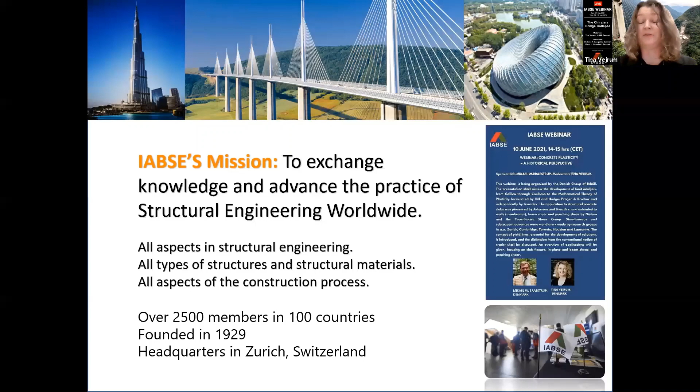The association has over 2,500 members distributed in over 100 countries. There's quite a lot of history: the association was founded in 1929, so we celebrated our 90-year anniversary already, and the headquarters are in Zurich, as I already mentioned. There are a lot of activities, and I'll make a small advertisement for the next webinar, which you can see on the side there—already on the 10th of June, there'll be another webinar in this series.

Publication is a good way for you as a member, or perhaps a future member, to participate and publish your work. There are four types of publications: the journal Structural Engineering International with 4 annual issues; the green books, structural engineering documents on fairly focused topics, resulting from a lot of the technical work done in the association; the blue books, focusing on case studies; and the proceedings of the various congresses and symposia.

At the center of the activities in IABSE, you'll find the national groups and the task groups. The national groups host a number of events like our webinar today. When it's possible to meet physically, there are seminars, workshops, site visits and similar. The national groups really form the link between the various activities in the association, from the national level to the regional level and to the international level. So if you would like more information about IABSE, I would encourage you to reach out to your local national group.

So let's move on. Okay, I think we need to share our screen. Is that what we do? All right, Tina, can you nod if you can see the screen?

Yeah, very good. All right, so as we've said several times now, this is a presentation of the investigation that we undertook on the collapse of the Chirajara Bridge. I want to go straight into a video of the collapse.

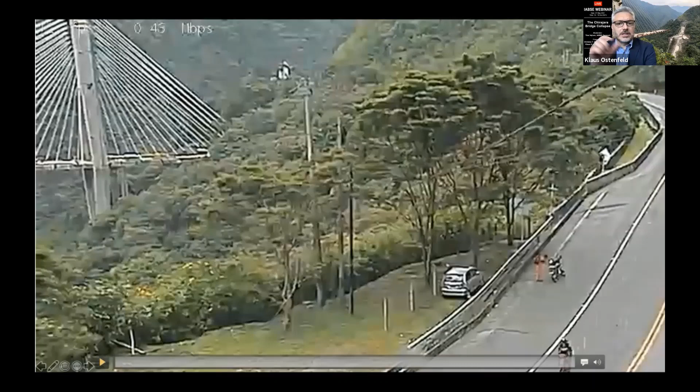I'll just turn the screen a little bit towards me so I don't fade out, and then when Klaus's turn comes, he'll turn the screen towards himself. I'll put this video on, and it's just a 17-second video. Just pay attention to the top left corner where you see the bridge. The video was taken from a security camera on the road, and it was not intended to be monitoring the bridge. It was monitoring the road, but we happened to be lucky in this instance that this road security camera was also looking at this portion of the bridge at that time.

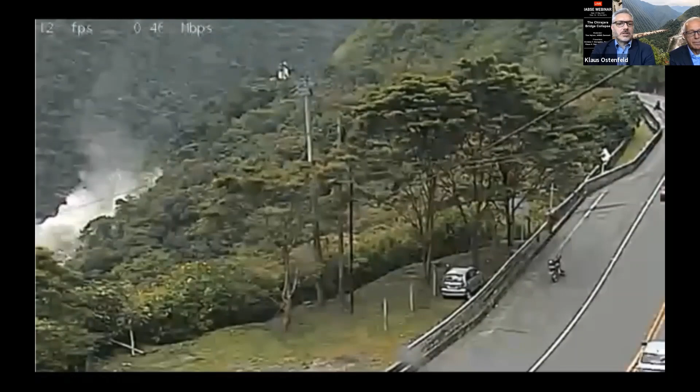Okay, so I'll play this video of the collapse once, and then we'll do it one more time. All right, so there it is. It's just a matter of a few seconds for the whole thing to collapse. So we'll do it one more time. All right, and that's it. That's a 17-second clip, that's all it was. In fact, the total collapse took much less time overall.

Okay, so now I want to describe a little bit some of the generalities related to the project before Klaus gets into some of the more specifics relating to the design of the bridge and some of the deficiencies that we found along the way.

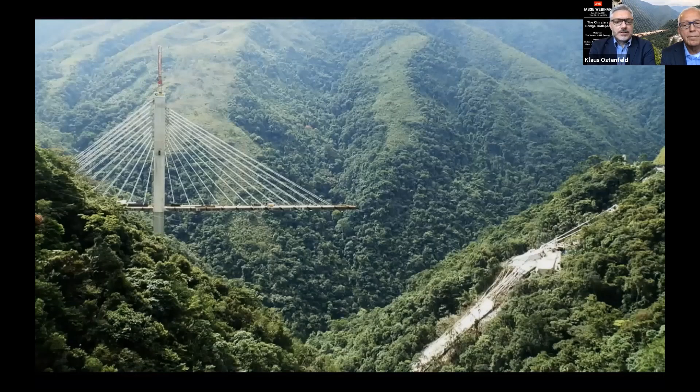So this is the site. This is what it looked like after the collapse. You can see the bridge. It's a cable-stayed bridge, it was under construction. Main span is approximately 285 meters, a 3-span cable-stayed bridge with reinforced concrete pylons and a composite girder. The cable stays are parallel monostrand stays, and it was the pylon, as you can see to the right, in the direction of Bogota, which collapsed. I'll tell you more about the actual location of the bridge and which road it was intended to improve in the coming slides.

So the bridge was insured by QBE, an Australian insurance conglomerate, and QBE contacted ONC loss adjusters in Bogota, who then contacted me and asked if I could lead the investigation on their behalf to try to determine the causes of this collapse. There was already another investigation being undertaken by the other parties involved in this.

But ONC had decided that we would be the right people to try to investigate this. So I agreed to this investigation, and then quite quickly afterwards I assembled a team of international experts. That was one of the conditions of doing this, that we had a grouping of international experts, so that this investigation could definitely be considered independent.

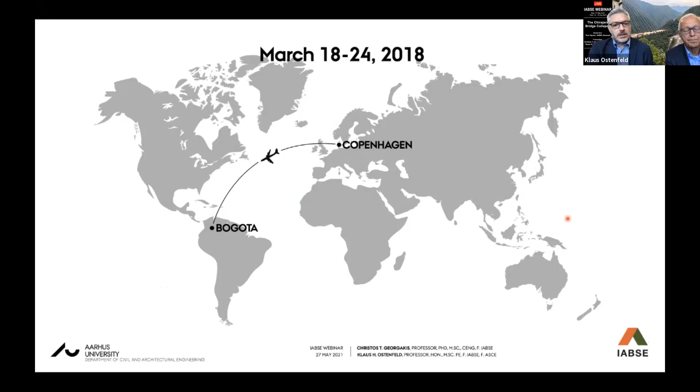The idea is that this highway, which connects Villavicencio and Bogota—the intention was to improve the highway so that the time it took to go from Villavicencio to Bogota, or the other way around, was reduced. At this specific location you can see this sort of horseshoe bend in the road, and that's where the bridge crosses. So you can understand, and you saw it from the pictures also, in this deep valley this particular bridge would cut a lot of time at this location.

Okay, but another thing I just want you to note, and I think you noticed that from the pictures, the terrain is very mountainous here in this region. There's nothing flat or easy about this—it's a very, very difficult and jungly type of terrain.

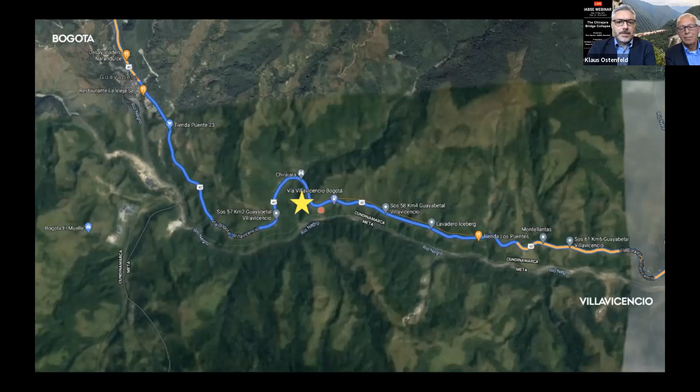I'm not going to say too much about this because Klaus is going to talk a little more about the specifics of the bridge here. But again, I just wanted to point out that the main span was about 285, actually 286 meters, the side spans around 69 meters, and the pylons were monopiles at the base—so we had monopiles going into the foundations. I think the rest I've already said, so Klaus will tell you more about that in the coming slides.

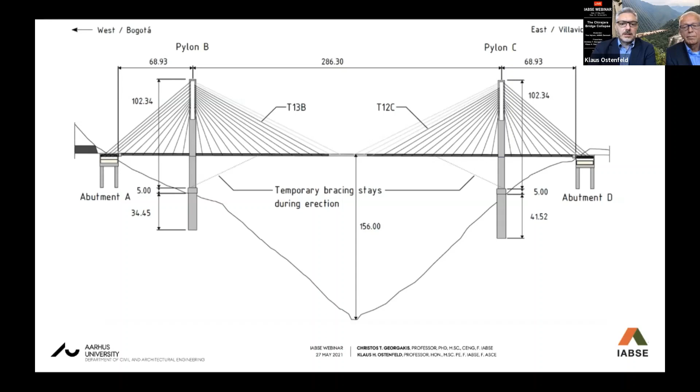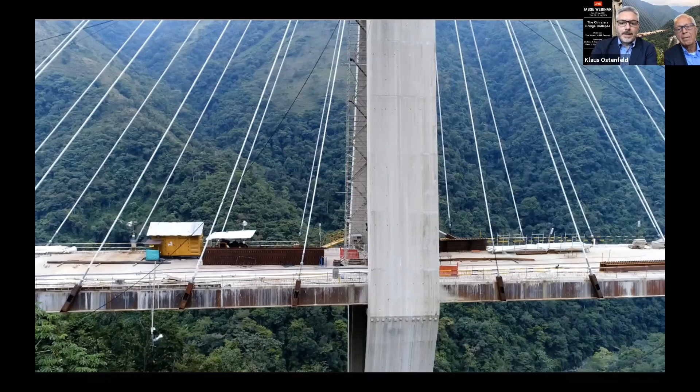Additionally, if you really pay close attention, you can see some of the details of the cables. In the next slide you can better see the shape of the pylon itself, this diamond shape. What I wanted to point out here is this concrete diaphragm, which exists between the legs of the pylon on the lower half of the pylon, below the girder.

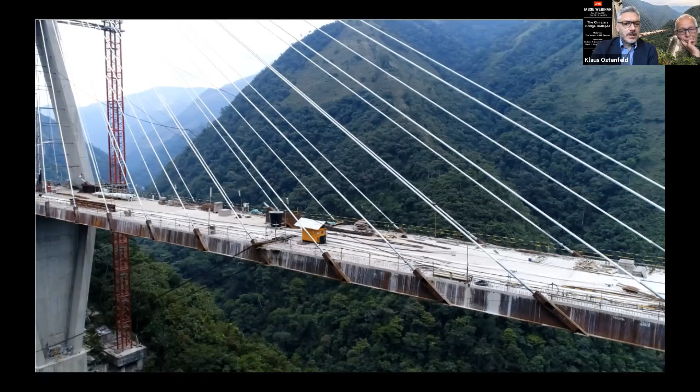Finally, I have this video here.

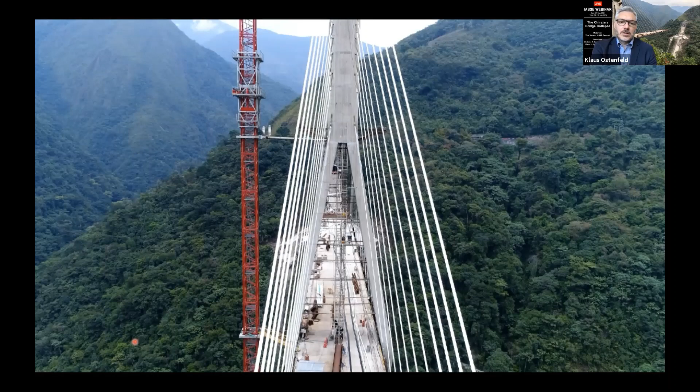I just put it in there to show you the sort of conditions we had there. We had to get abseiling classes, or some sort of crash course, so that we could go down the mountain and climb all over these very large pieces of bridge, which formed the wreckage of the collapsed pylon.

Finally, on August 31st, 2018, after a little over 6 months of investigation, we submitted the report on the investigation of the bridge collapse. I think it's definitely a very comprehensive report, which details pretty much everything that we observed and found during the investigation.

So this is sort of an introduction and some of the generalities surrounding the investigation, and now I'm just going to pass it over to Klaus so he can start to get into some of the more nitty-gritty details of the design itself and the deficiencies.

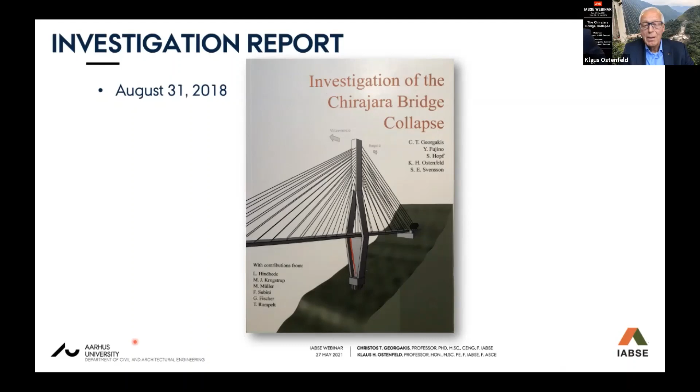Yeah, this was a joint effort, as you can understand, and that's why we have decided to share the presentation here. What I will do is try to give you enough detail about the structure and its various constituents in order to understand, after my part of the presentation, the collapse mechanism that Christos will then talk about.

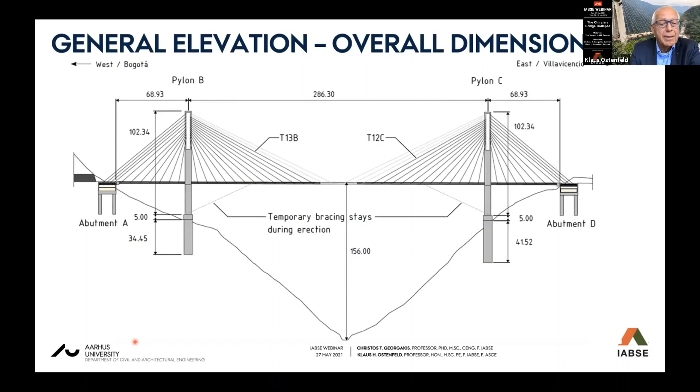So basically, on the face of it, what you see is a rather conventional cable-stayed bridge. A single-span conventional cable-stayed bridge with a 286-meter main span, nothing in particular. Actually, it should be a very simple thing to design a bridge like this and construct it. But it wasn't, apparently.

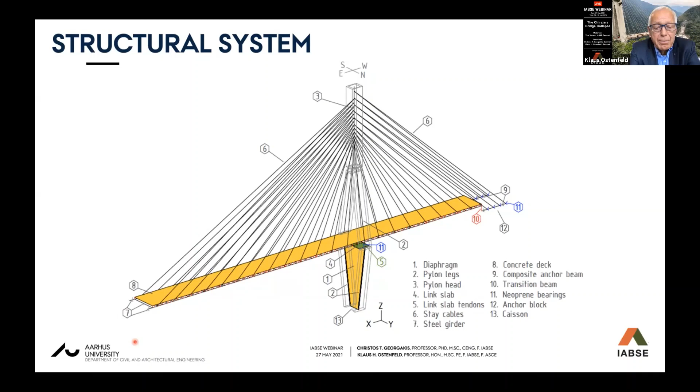The deck itself, as you will see later, is not torsionally stiff. It is actually very slender, torsionally wise. So all torsional rigidity basically stems from the fact that we have two sets of cable stays attached to either side of the deck.

When we look into the pylon itself, again, it looks fairly conventional, diamond-shaped, assembling all stays in the top of the pylon head, straying both sides from the top of the pylon.

We should pay special attention to the fact that we have a rather unconventionally slender link slab connecting the two knees, as we call them, of the pylon legs, which of course would need to be held together to resist the thrust and take the deviating axial forces in the legs, and make sure that we deviate the forces towards the common foundation.

Maybe also a bit unconventionally, we have a diaphragm, a fairly thin diaphragm, 0.5 meter thick, between the 6 meter deep legs of the pylon. As you can see in the cross section, rather thin, slender members connecting the two legs. And as we shall see later, this diaphragm actually played a major role in ensuring that the bridge was standing up until the very moment when it collapsed.

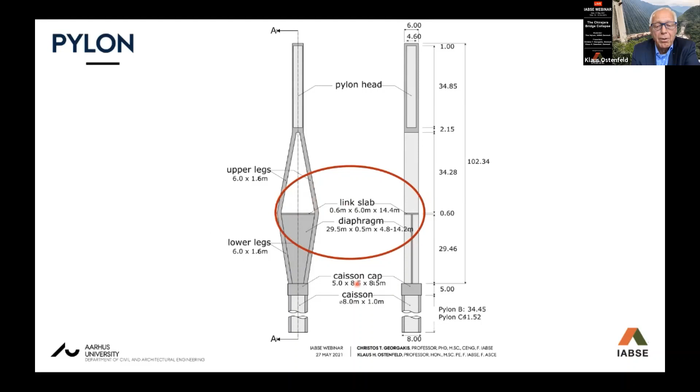In fact, to disclose that already now, the linkage provided by the link slab was far from sufficient to redirect the forces in the legs towards the foundation alone. So as we shall see, the devil lies in the detail. And that was unfortunately also the case for this particular bridge. A basically conventional bridge had a lot of deficiencies in its design and construction.

Let's focus on the tension link slab. It's again a rather thin slab, about 6 meters wide, same width as the depth of the pylon legs, and about 0.6 meter thick. Pay attention to the fact it was post-tensioned by 12 cables, actually strands, transversely, 12 cables, one strand each, linking the two knees of the pylon. So that is, of course, a very, very minimal post-tensioning.

And further, one should notice that the ordinary reinforcement, the mild, unstressed reinforcement in this deck slab, was not projecting into the leg.

So in other words, there was no continuity at this particular interface between the link slab and the knee of the pylon, no other connection than these strands, the 12 strands that I mentioned before. So that's really an eye catcher.

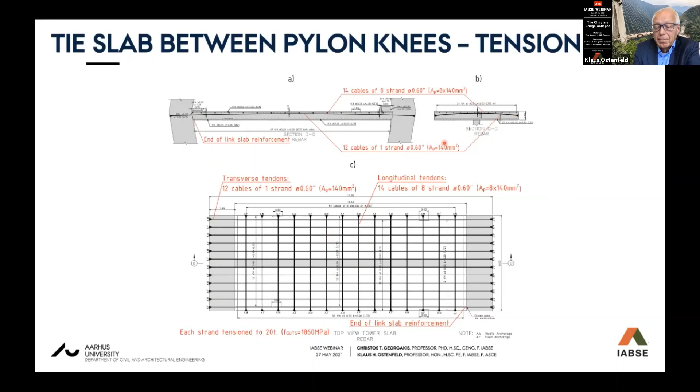Then in addition, this slab was post-tensioned in the longitudinal direction of the bridge, transversely to the link slab, by a higher amount of prestressing for some reason which is not particularly clear. If you look closer, you see the transverse strands and the longitudinal cables, each consisting of 8 strands in the longitudinal direction of the bridge.

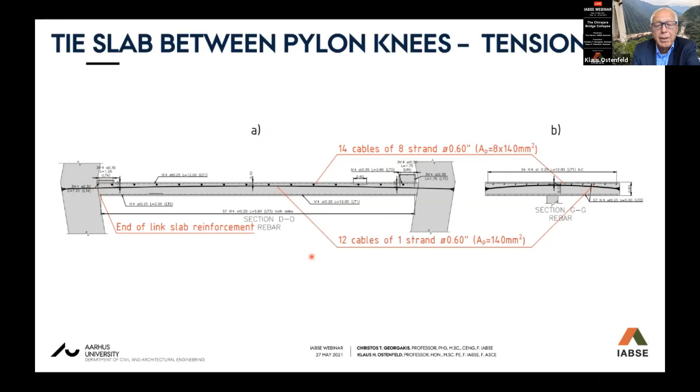And at this particular point, no connection with ordinary reinforcement. That will be demonstrated also later. And of course, that was an important observation when you just look at the design as such.

Another observation, the pylon head, again rather traditionally, as is commonly the practice in many places, you improve the top structural strength of the top of the pylon by encasing a steel box in which you can efficiently anchor. It's not shown here, but you can anchor the individual cable stays, which you have to imagine protrude like this from the top of the pylon head in all 4 directions towards the deck.

So in other words, the top is of course subjected to a horizontal pulling apart force, to put it primitively, equal to the accumulated horizontal components of all strands, of all cable stays.

Now we found again that it was quite obvious that the steel casing would not be sufficient to resist these forces, and the reinforcement in the concrete encasing the steel box was not sufficient either. So even the combination of the two would not fulfill ordinary design criteria for these forces.

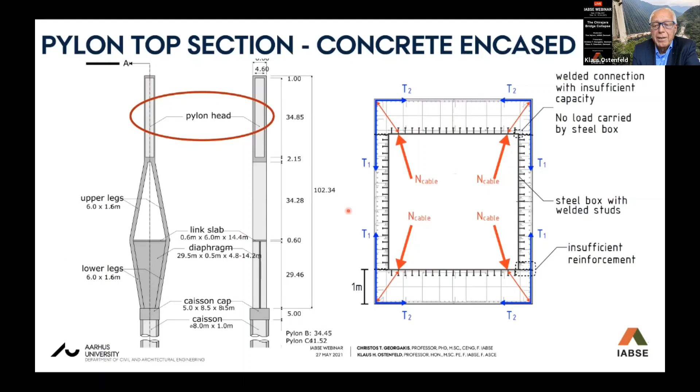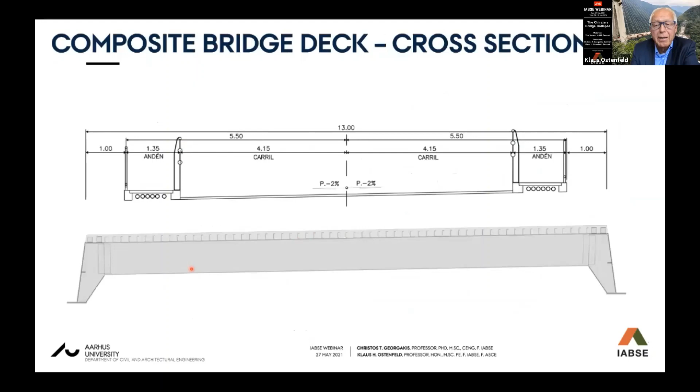The deck is again a fairly conventional deck. Let me go to the next one, it's maybe easier. Consisting of a plate girder outside, inclined more or less in the same direction as the stays would hit it, with a flange on the bottom, and then cross girders once in a while transversely, with a concrete deck cast on top.

Actually at the time of the accident, there were still missing the last few deck castings on that particular cantilever when the collapse occurred. So the idea is you erect the steel works first, and then you cast this concrete deck on top with shear connectors. The shear connectors were changed from original studs to channel pieces welded on top of the cross girders.

A very simple composite bridge deck, but actually, as I mentioned earlier, without any torsional rigidity at all, torsional fixity provided by cables at both sides.

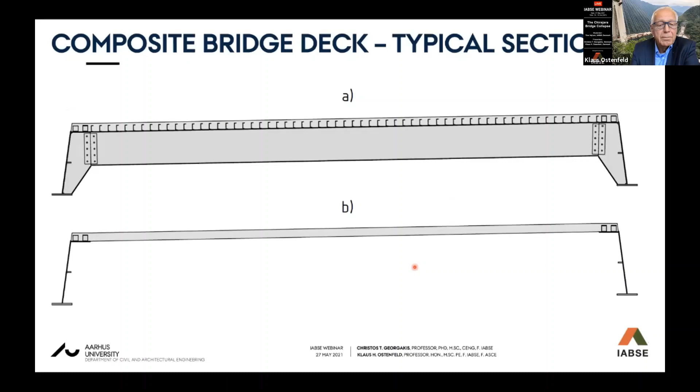The detail of the connection, the anchorage is located along this line, and here with the E we noted the eccentricity imposed on the deck, which it was not designed properly for, instead of arranging the detail in such a way that the cable stay force would go directly in the same plane and same direction as the web, which logically would have been the case.

So this eccentricity was cause for quite some bit of analysis-wise overload of the steel in this region. The cross girder you see here, a 9.5 millimeter plate going transversely, connecting the two outer plate girders.

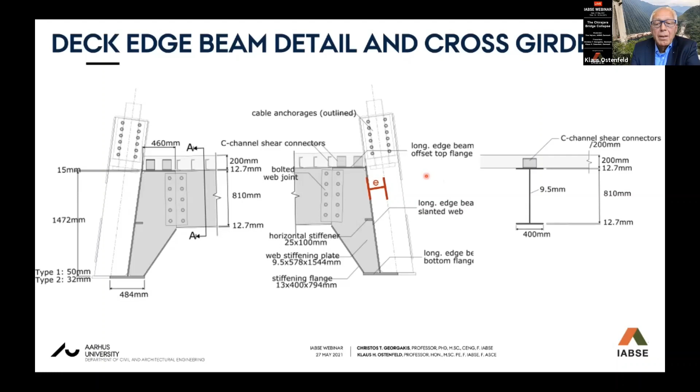Now, I mentioned that the girder is not torsionally stiff, which was of course the case for the well-known Tacoma Bridge failure in 1940, a suspension bridge. I'm not going to play this video because I think it has been shown so many times that you are bored, but this all illustrates what happens. We should all remember that when we do our designs.

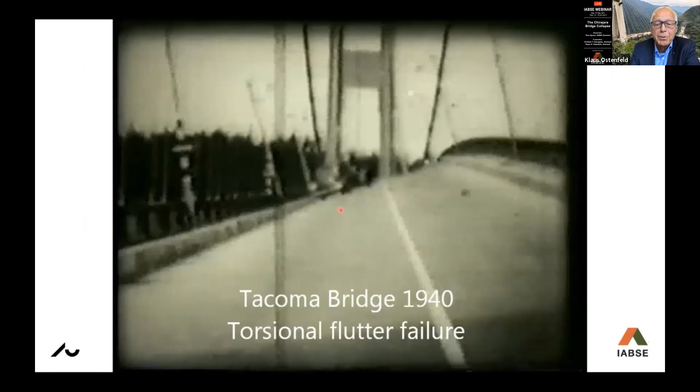The designer had made a provision for including some kind of wind fairing onto the deck, but it was not installed at the time of the accident, and whether it was actually planned is not known. But at least there was a design in the documents that we found.

Whether it would have helped, I doubt it, because the real problem is the release of vortices at the bottom of the girder, which makes this girder non-aerodynamic in any case, and would therefore also not prevent any tendency to get into some kind of undesirable vibrations during certain wind speeds.

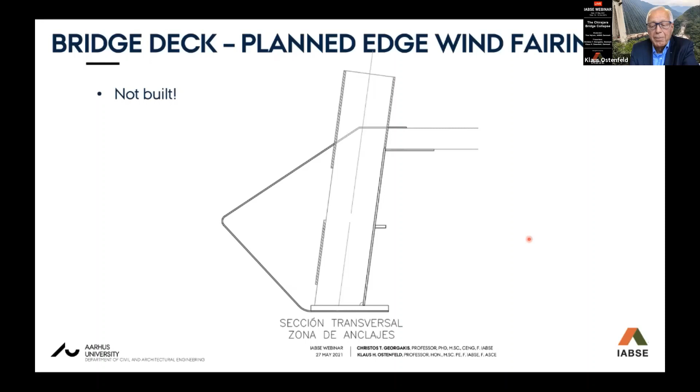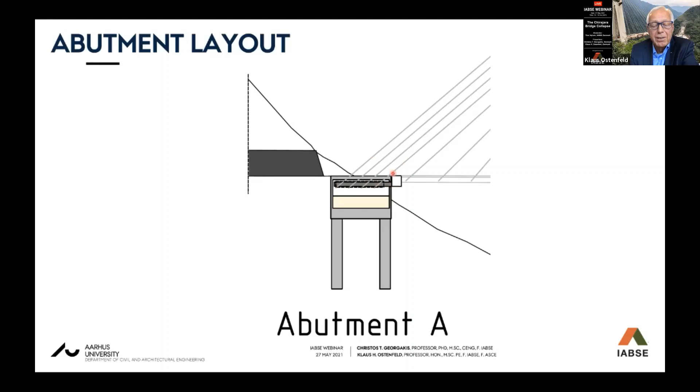Then I would like to focus a little bit on the abutment layout, which was rather special, I must say, very special in many cases, founded on concrete caissons. This particular part I'm pointing at is a girder, a beam in which the four backstays on each side are attached. Pay attention to that one, because it was attached to a transverse beam and then again to the girder.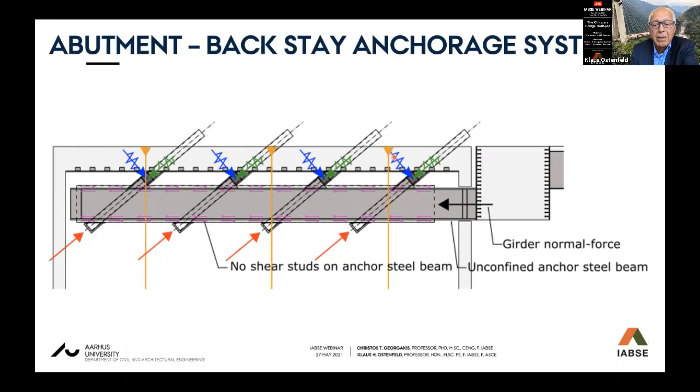Further, there was at this point a design, a sketch indicating the analysis model with springs and so on, but actually there is a rubber piece interjected here, a neoprene bearing type, which will cause the girder to move when temperature causes it to expand and contract. It will not move horizontally, it will actually move inclined in a plane perpendicular to this rubber bearing, which means the expansion joint would only align in one particular position, not always vertically.

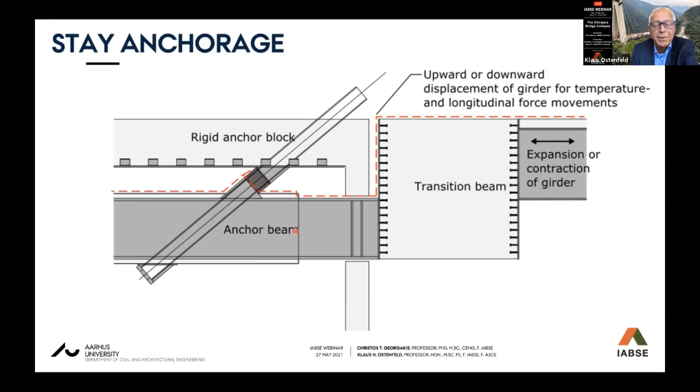Whether that had been solved at the time of the investigation, I don't know, nor how it would have been solved, because the movement will be forced to be along this inclined line.

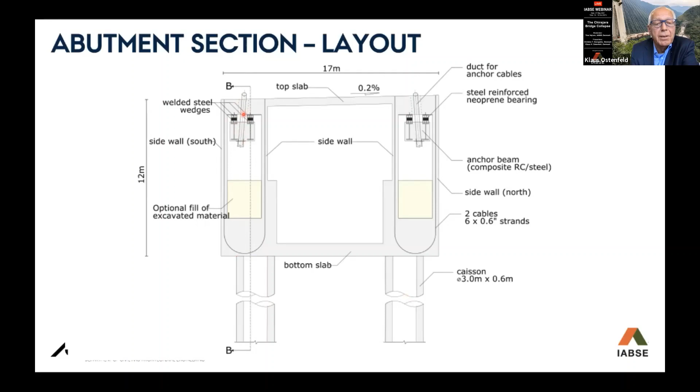Here you see a cross-section of this particular area of the abutment caisson. There are the beams, the rubber bearings, the caisson post-tensioned vertically in a normal conventional way, and then the caisson foundations or piles below. So the cable tension would be subjected at this particular point through the neoprene bearings.

In horizontal section, these beams were connected to the transition beam through vertical web beams, meaning that any horizontal component would have to go through a beam designed more to take vertical moments around a horizontal axis rather than a vertical axis. So it was actually overloaded, and would form more or less a plastic hinge formation here. It was a very, very peculiar type of abutment.

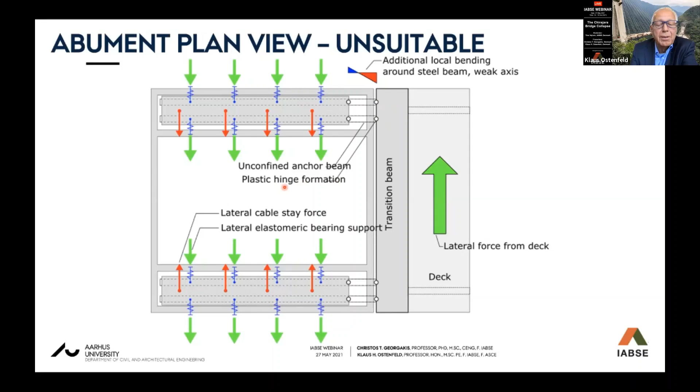Here you see an illustration of what would happen with the slightly inclined cable plane acting on a beam with bearings inclined in the other direction, but horizontal in the transverse direction. So they would be subjected to a horizontal shear force, not accounted for. The beam itself was not reinforced adequately to take the spreading of this stay force out to the two supporting beams.

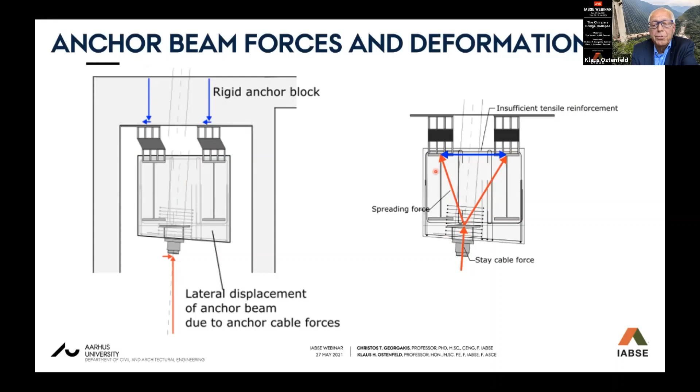So to sum up, there are lots of details, but in short: the stay force transfer in the pylon head was inadequate. The concrete-encased box, the stay anchorages, and the bridge girder web with eccentricity caused overload to the steel and the girder. The horizontal tie between the pylon knees was not less than catastrophically insufficient, with inadequate post-tension cables and no continuity of reinforcement. The abutment design and bearing were structurally inadequate in many ways, a very complicated setup.

And the aerodynamic stability was also questionable. What I didn't mention is that the whole thing led to, as we shall see later on when Christos explains how the bridge actually failed, a very fragile and completely unexpected failure within 2.5 seconds or so. So there was no way for anybody to escape.

The diaphragm played a very important role in ensuring it did not happen earlier, because the horizontal reinforcement in the diaphragm wall was in fact protruding into the pylon legs, and that delayed the fatal accident. I'm not going into a lot of detail, but the foundation caisson, an 8-meter diameter caisson, also had some deficiencies.

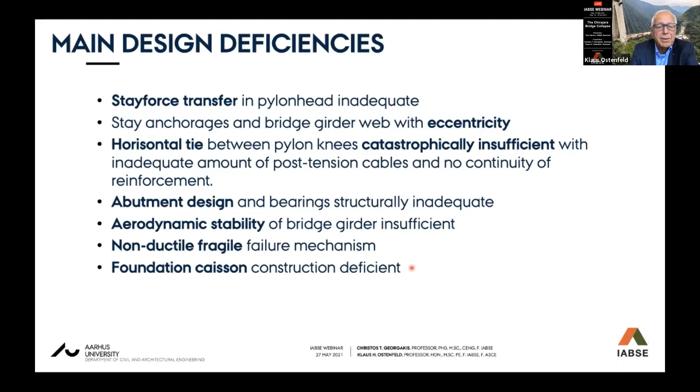So there were quite a number of discoveries in a design which, on the face of it, looked quite normal. The devil lies in the detail. This is more or less repeating what I said, so I don't think I need to go further into that one.

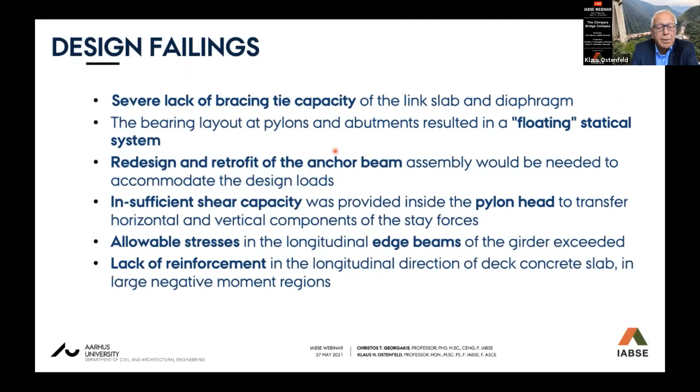So over to you, Christos, to explain what really happened and why and how it happened. Thank you, Klaus, for going into detail with all those specific deficiencies. I think you've understood from the presentation that there were a lot of deficiencies, but for the collapse itself there was one major, or main, deficiency at that point of construction which led to the collapse. So let's go a little further into what this is.

We used all of the different types of material models and different types of elements which should be used for the different parts of the bridge, as one would do in the design or analysis of such a bridge.

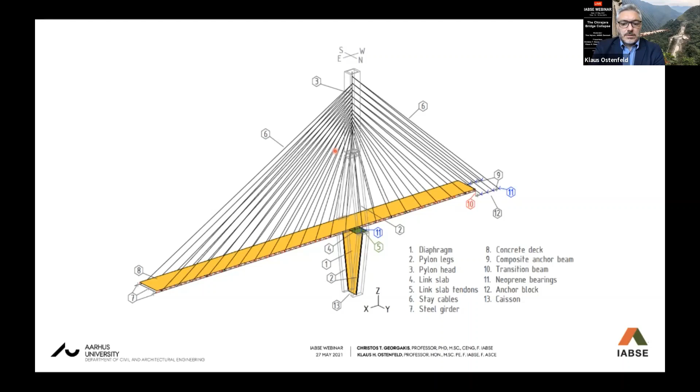One of the important things was the material model of the concrete itself, and this turned out to be a little more involved than we thought at the beginning. That's partly because we had to understand exactly what sort of behavior we had in the concrete in the diaphragm — that's the wall between the legs. Through a little research, we found that the diaphragm would not behave in a ductile manner, but would start to crack and fail in a non-ductile manner, just because of the level of reinforcement. It was under-reinforced. A properly reinforced or over-reinforced diaphragm might have behaved in a more ductile manner, but these under-reinforced elements will tend to behave in a non-ductile manner.

This figure gives you an idea of what might have been happening at the interface between the pylon leg and the wall when we introduced the deviation forces coming from the top of the pylon. The leg wants to spread apart, and as it's pushing, there aren't enough tendons in the link slab to hold these deviation forces. As the legs push the lower legs apart, the wall is there trying to retain them, and the reinforcement is effectively the only thing holding these legs together.

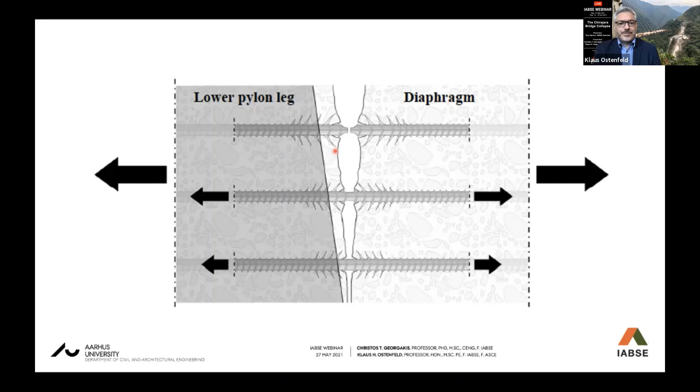This is me on top of the link slab and the wall, the collapsed link slab and wall. If you look at the side of the wall, you can actually see the reinforcement — very small bars, relatively sparsely spaced for that size of wall and this size of construction. You can just see these reinforcing bars down here, these little bars. That's effectively what was holding the two lower legs together. Then we have the tendons, which Klaus highlighted earlier.

We have 12 of those, 12 single tendons. Through our calculations, they could only provide about 25% of the needed restraining force for the deviation forces that existed on the bridge.

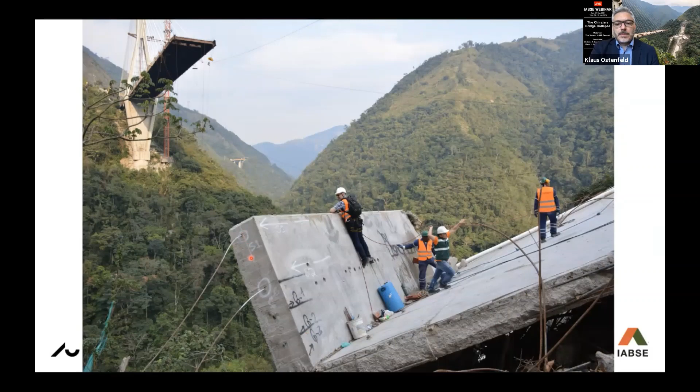If you look more closely at these photographs we took on site of the reinforcement coming out of the wall and connecting the lower legs, it's quite obvious to see the yielding and necking of the reinforcement. There was definitely pulling action which led to yielding. This reinforcement was not sheared, it was not mangled in some other way — it was definitely pulled apart and yielded in these locations.

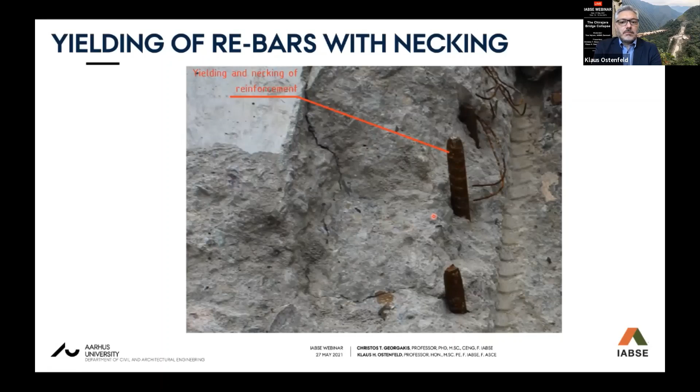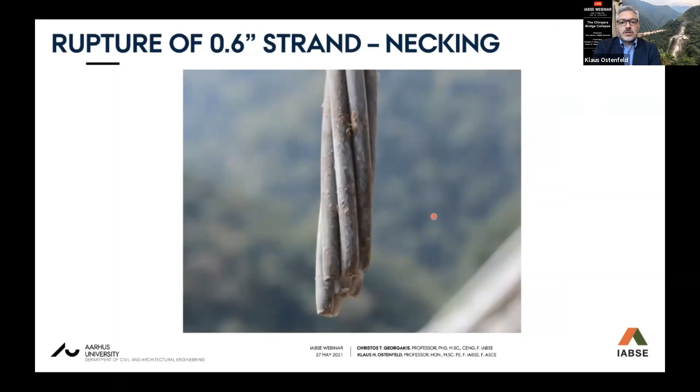The same eventually happened to the 12 tendons. Once there was enough elongation of the system, once the legs had split apart enough, we ended up getting rupture of the 0.6 inch strands. You can see this necking occurring there.

Now the important thing in the finite element analysis is the introduction of the dynamic component. We did a static analysis of the bridge in its configuration just before collapse, and in fact we found that the bridge was able to stand — it was not collapsing under the loads we had placed on it. But once we undertook a dynamic analysis, we found there was a dynamic amplification factor of the loads of approximately 2.0.

That means once the reinforcement started to yield and rupture — the reinforcement in the diaphragm wall connecting the two lower legs — once the deviation forces were enough that this reinforcement started to rupture, we got a dynamic amplification of the upper loads of about 2.0, and that was enough to lead to the full collapse of the bridge.

In fact, when we just tried to model the bridge without any other information other than the loads that we knew were on the bridge at the time, the materials that were used, and the different elements, the way they were positioned, we got to 99% of the actual load on the day before the collapse happened. So we were very, very close in our analysis to the actual loading scenario that we had on the day. We're very confident from that analysis that it gave us the full picture of what was going on and what happened during the collapse.

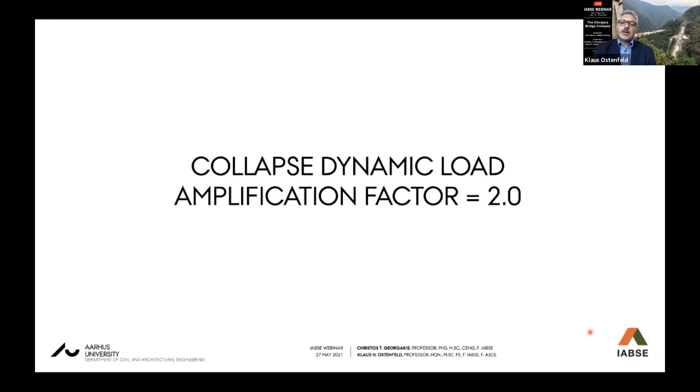So just to show you what we got from the finite element analysis, here we can see at time 0 we have cracking beginning to occur in the upper corner of the diaphragm because of these deviation forces we talked about. 0.2 seconds later, we have the elongation of the crack and the opening between the leg and the diaphragm. Then subsequently, about half a second later, we have full crack formation from top to bottom, and the leg completely coming off of the wall or delaminating from the wall. So that's, in a nutshell, the main mechanism which led to the overall collapse of the bridge.

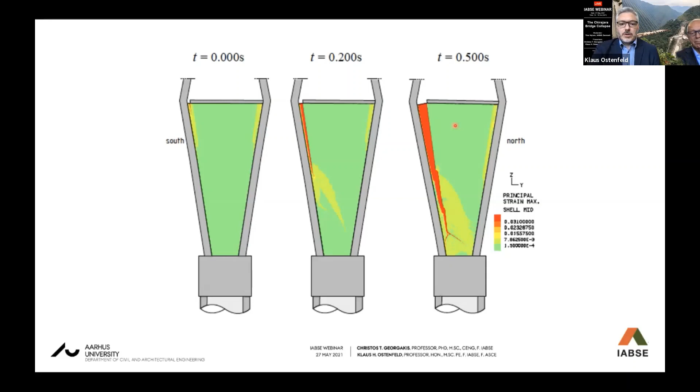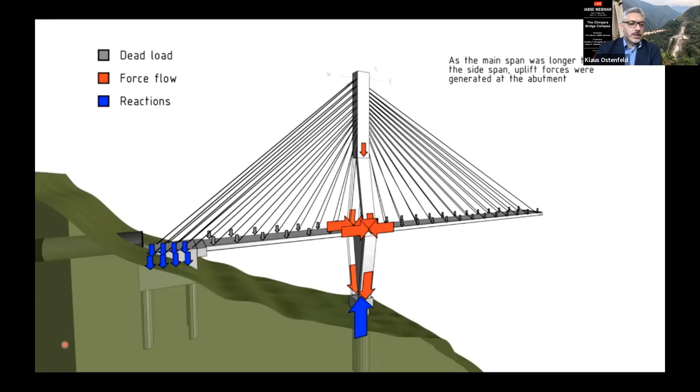Now we have a video, it's about a 2-minute video. There's no sound to it, but I'll put that on. What it does is show what the bridge pylon with the girder looked like before the collapse, and how what sort of forces were involved and what sort of mechanism was involved in the overall collapse of the bridge. So let's see if we can get this going.

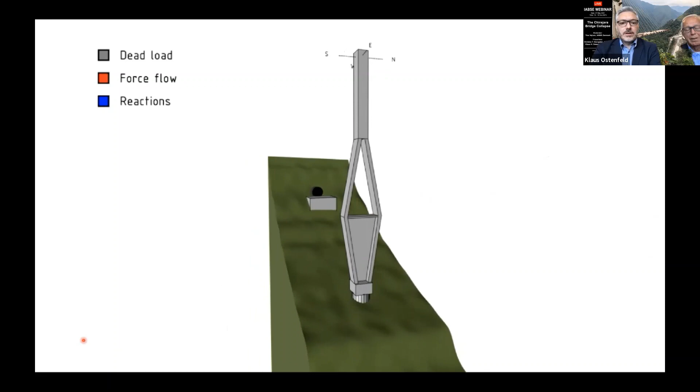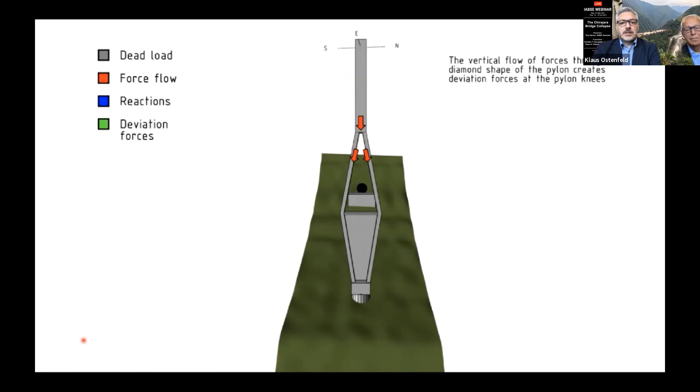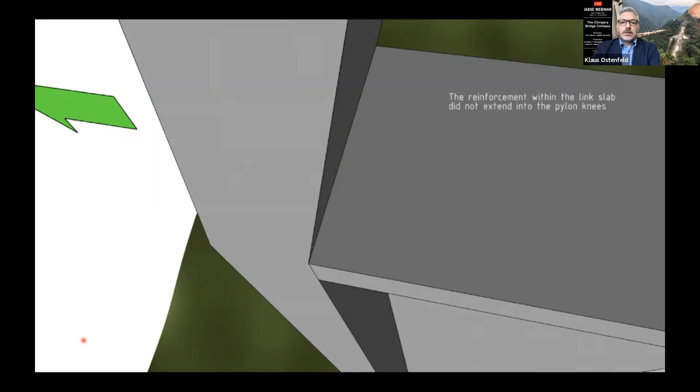All right, so we see the forces here. Now we've taken away the girder, and we just have the pylon, and we have the forces from the top going down through the legs, and these obviously cause some deviation forces. These are the green arrows that we see. Now these deviation forces are pulling the bridge pylon legs outward, but we have no extension of the link slab reinforcement into the legs themselves.

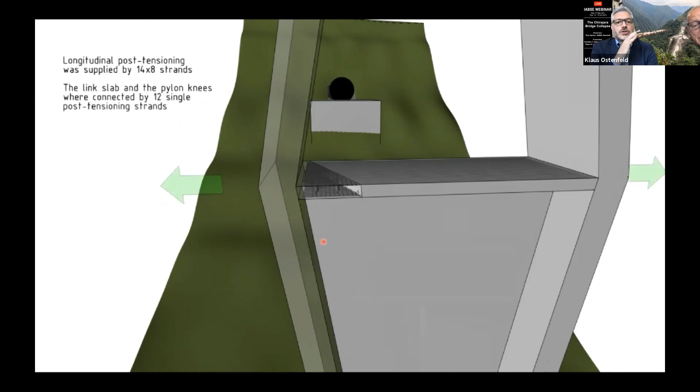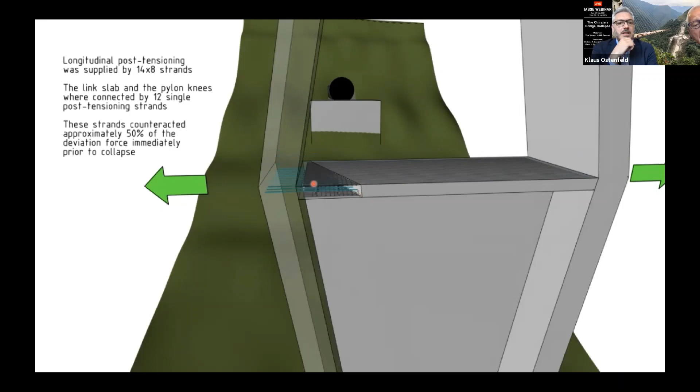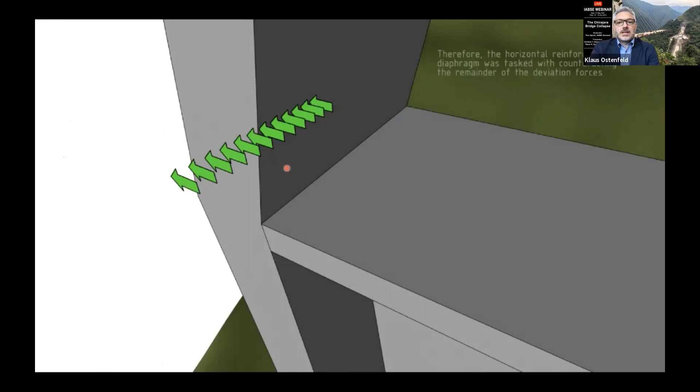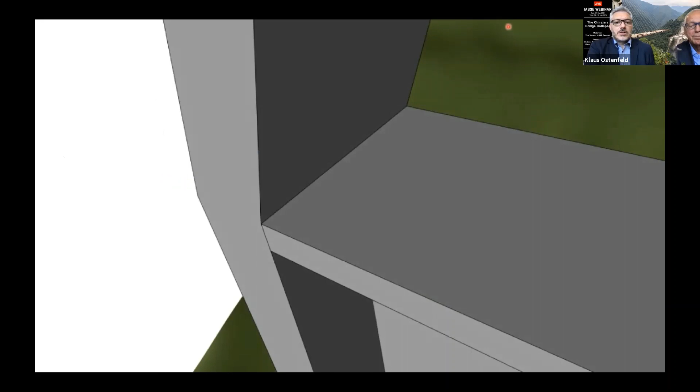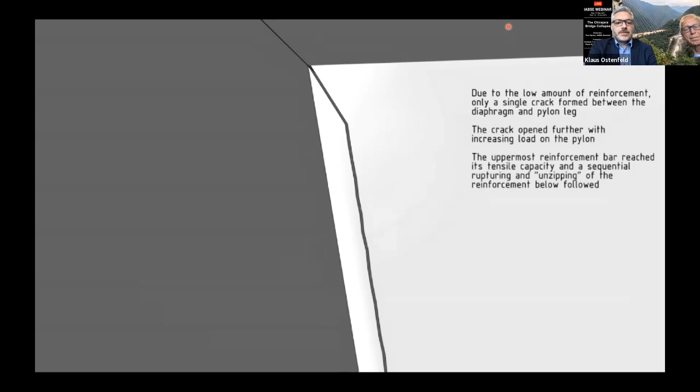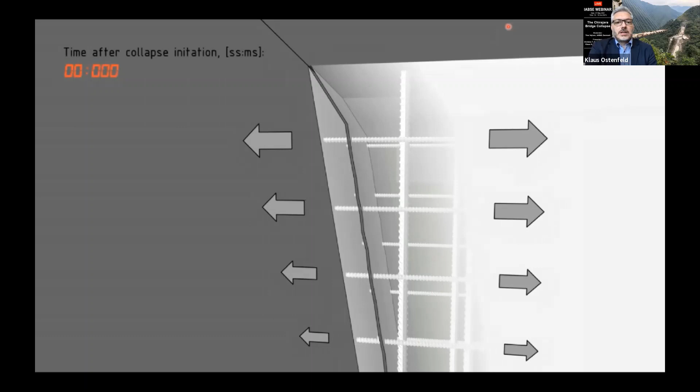So what happened is that as the forces were too great for the tendons and the reinforcement we had at that location, we ended up having a crack initiating in the corner of the diaphragm. The crack eventually, due to the increase of forces as we're constructing the bridge, opens up further. And then at some point, we begin to have yielding of the reinforcement. Very quickly afterwards, due to this non-ductile nature of the material, we have rupturing of the reinforcement. This all happens very fast.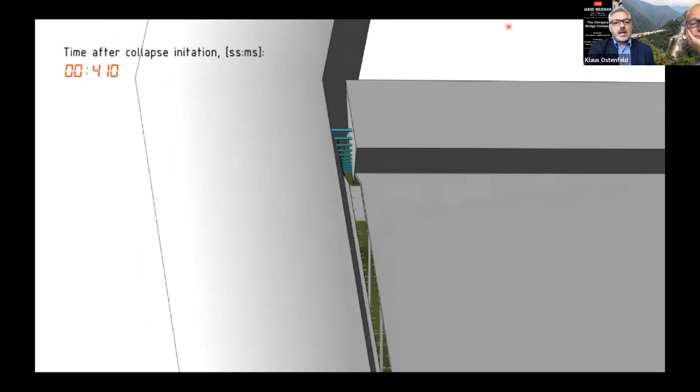So we have a kind of unzipping of the reinforcement between the wall and the leg occurring. You can see this is all happening within less than 3 seconds. So within a time frame of less than 3 seconds, we have full delamination of the legs and the diaphragm, and then the subsequent collapse of the bridge. So the sudden nature of the collapse of the bridge without warning can be attributed to the brittle design of the diaphragm.

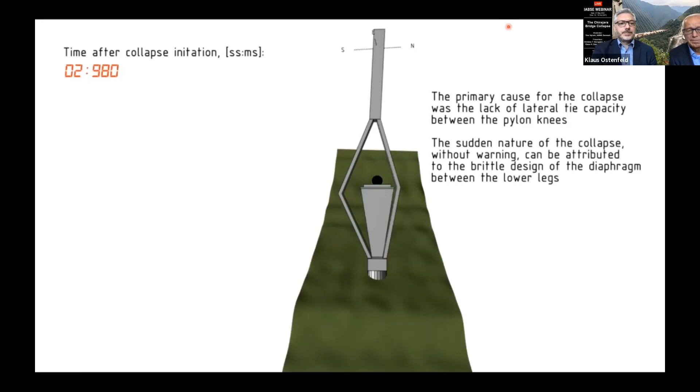So one of the key observations we have, or at least one of my key observations, is that ductility is a form of redundancy in a way, because if the diaphragm leg combination was reinforced in such a way that we had a ductile behavior, then there would have been some warning. The workers would have seen the cracks initiating, and they would have been able to stop the construction, get off the bridge, and initiate some investigations. There was no possibility here for that.

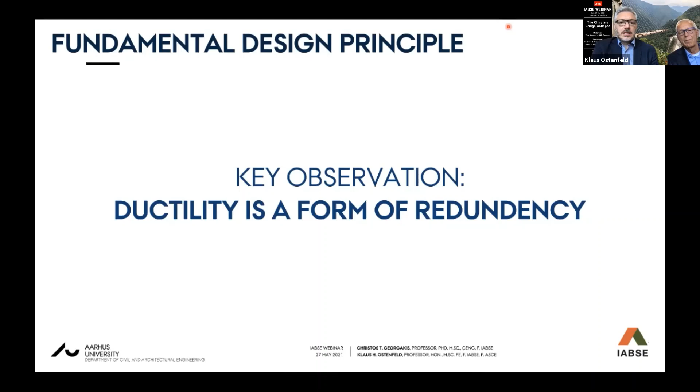Once the reinforcement yielded, it almost immediately ruptured, and then the whole series of reinforcing bars from top to bottom just unzipped, and the leg moved away from the diaphragm. So that's pretty much the collapse mechanism in a nutshell. And I think after this we have Klaus with some project organization comments and recommendations.

Thank you, Christos, for this explanation. Now we just have a brief look to finish off, to try to identify what happened and why it actually happened, to the extent that we were able to identify at least some findings that we could take with us in the future.

I want to point out here the organization. We have the owner who made a contract for operation and maintenance, and a contract for construction with a main contractor, rather conventional. Initially it was contracted to one party. We have no names here, but that's how it started out, and a phase 2 design was developed as a basis for construction.

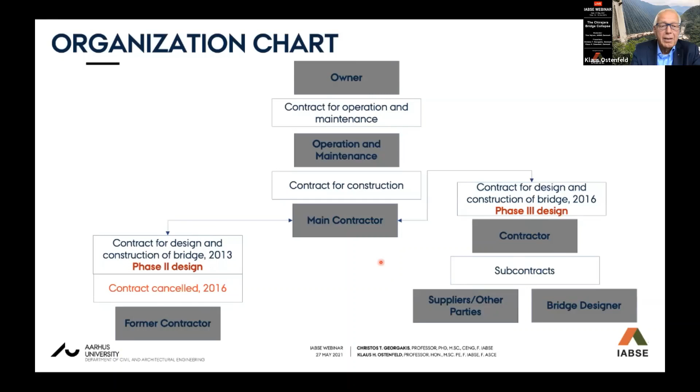For reasons that I at least don't know, maybe Christos does, this contract was cancelled, and the contractor was dismissed at that time. Another contractor group was engaged to produce a phase 3 design, presumably based on the existing phase 2 design, which was then subcontracted to suppliers and others, and a designer who could actually do this phase 3 design. That's the rough indication of how it was organized.

Nothing special really, except for the cancellation, which proved to be crucial. The contract, which was a design-build contract, had these key elements. The new contractor assumed all works and risks with apparently insufficient review. That's something to underline.

He was also supposed to accept the phase 2 design as a reference design, and to perform a phase 3 design for construction. The time schedule was rather concentrated for this. It might not have been completely impossible if they had decided to continue the phase 2 design, but actually the phase 3 design was a different one, particularly with regard to the areas that we now have seen caused the failure.

Also, the new design contract stipulated the procedures for the design and the time schedule for construction, all quite standard. They had nominated key personnel that was a precondition for the contract, and of course they should implement a quality management system.

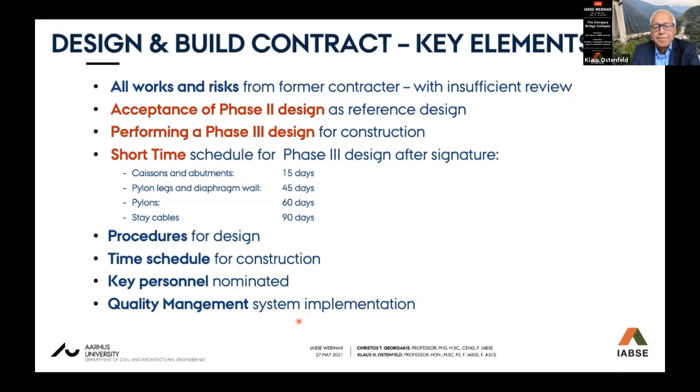Now, just to show one of the major differences between the previous phase 2 design and the new phase 3 design that you have seen on all the previous slides - this is actually the tie beam design for the phase 2 design, which supposedly should have been the one they'd continue in phase 3, at that time without the diaphragm below the crossbeam. So a very conventional diamond-type pylon with a substantial cross tie between the two legs where it was needed.

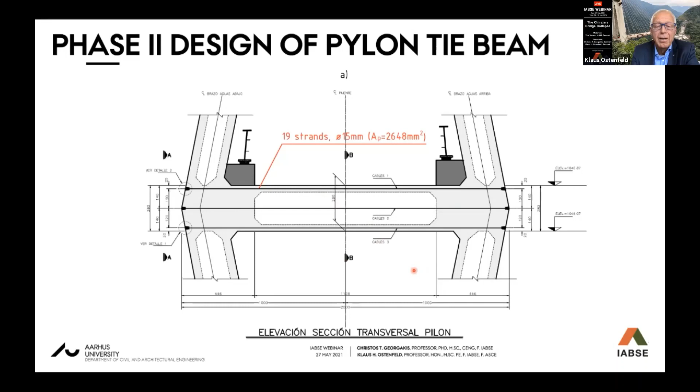But apparently that one was dismissed and replaced by the one we saw in the previous presentation. So what do we observe when we try to dive into the documentation for this entire project - which was a major study - but actually we couldn't find much evidence of which selection process had been used. We couldn't identify any reason why the phase 2 design was abandoned and replaced by the phase 3 design, which was quite different. And remember, the time frame was very short for designing it.

So actually it became a new bridge to be designed within, we can say now, an impossibly short time frame. This new concept implied, as you've seen from the previous presentation, the pylon design was changed with a new design. Here it's indicated that the tie capacity was reduced by a factor of approximately 13. I don't know if this number still stands, but that's at least what I found in our documentation.

And the stay anchorage system at the pylon top was different. The anchorage types at the bridge deck - you may remember from the previous slides I talked about eccentricity implied between the cable plane and the web extension. In the phase 2 design, they were aligned - a more conventional attachment of the cable stays to the webs in perfect alignment without eccentricity. And then, of course, the abutment and bearing layout, which is a bit peculiar in the phase 3 design.

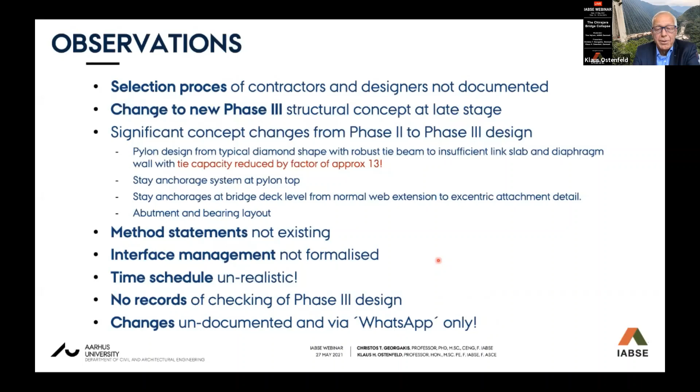So once we start assembling all these findings, the conclusions are almost obvious: an independent category 3 check must be done for a major structure. This structure was not adequate for its purpose, and it had always an imminent risk of failing in all phases.

As Christos was mentioning, it came up to the very point of safety factor 1.0, with 99% of it. Then when they were ready to pour the last piece of concrete on the deck, it collapsed. That had not been cast on the second half of the bridge, which is why it was still standing when the visiting team passed the construction site. But it was probably standing with a safety factor of 1.01 or something like that.

Then the undocumented changes during construction are, of course, not acceptable, because it is very important always to know whether the construction follows the design intent laid down by the designer. That has been the cause of many failures in the past, in particular for scaffolding structures and so on.

Why did it occur, and why did it pass unnoticed? That, of course, is very difficult to completely know. But one can conclude at least that it was a series of errors and omissions that altogether came beyond what the structure actually was capable of being subjected to and holding up for.

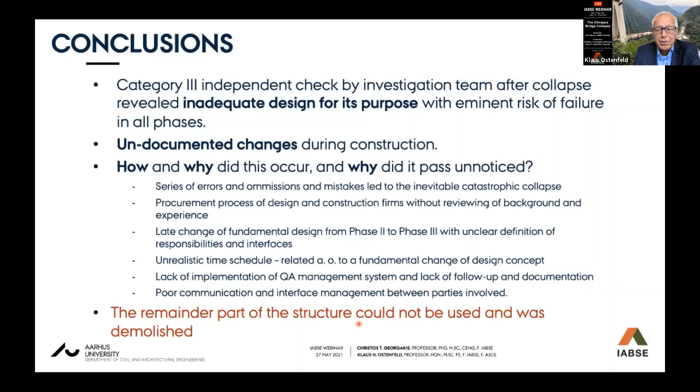We looked upon the existing structure, and that was part of our mandate, to see whether they should just rebuild the collapsed part and reuse the other half of the bridge. But actually we came to the conclusion that it was so full of all these errors that we saw from the previous discussion that it would not be salvageable. So it was decided to do this.

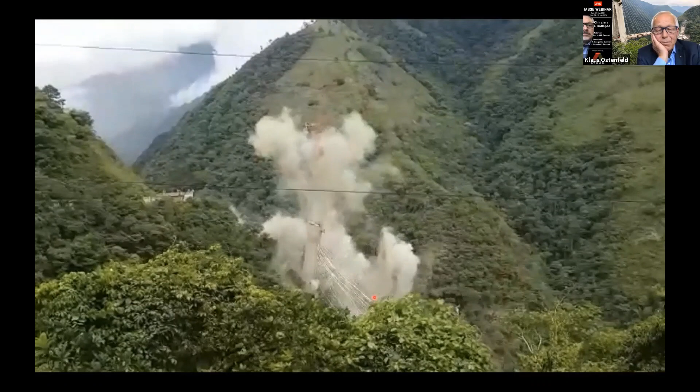So that was the dramatic conclusion for that bridge. This time without any people, without any casualties, because it was planned.

But it actually illustrates again the failure mechanism that Christos was just explaining a little while ago, with the zipper effect, the very rapid evolving zipper effect between the diaphragm and the leg. The insufficient tendons were acting like rubber bands for quite some time because they were ungrouted, so they could be elongated quite a bit before they finally broke, but they were far from sufficient to prevent the catastrophic failure. Further on, the horizontal pressure increases as the failure mechanism evolves, because the angle between the legs, top and bottom, increases.

So these are the lessons. I don't think I will read them up, but I think if we use what is normally good practice, and we're very fortunate for that, good internationally accepted practices all the way through, and if we are very much aware of the fact that we should at all times know what we're doing and not do it too fast, so we know exactly what it's doing.

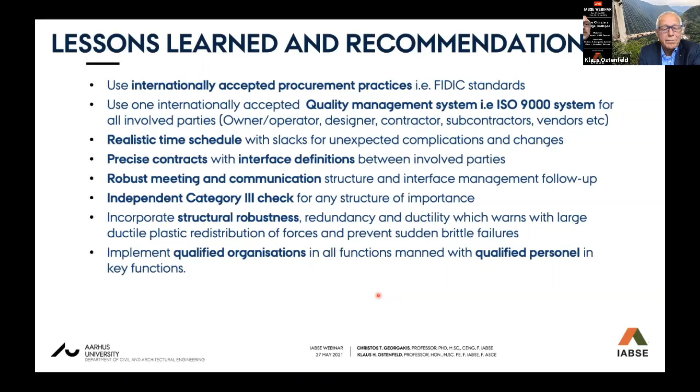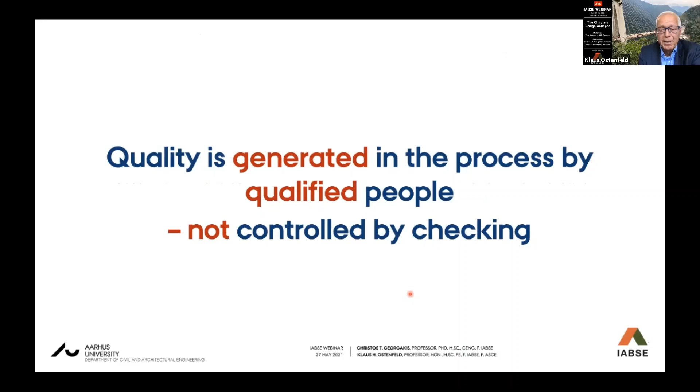So that would be my concluding remarks, and maybe this little word here, that we can generate the right quality with the use of qualified people. Checking will not do the job as such, but it's the one that we will use for picking up mistakes if they nevertheless are being made by even qualified people.

So with this, I will say thank you on behalf of myself, and I guess we are ready for questions that you might have. Thank you.

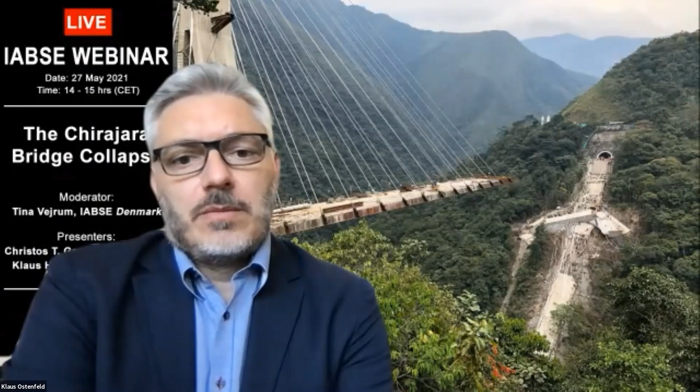There are a number of questions on the foundation design, geotechnical investigations, and whether there could be deficiencies in the foundations that played a role in this collapse. Is this something the investigations covered? Yeah, we looked into that and found that was not the cause of the collapse. It could not have been the cause. There were deficiencies in the caissons and the overall quality of construction, in the corrosion protection of the tendons, and in various aspects of the caissons, but all in all, they were not what led to the collapse of the bridge.

Thank you very much for a very clear answer. Here's a question on construction management, addressed to you, Klaus.

Do you think new construction management tools, such as a bridge information modeling system, could help avoid this kind of tragedy, or at least avoid undocumented changes via WhatsApp?

I think any professional approach with proper agreements between the parties, clear definition of what is the responsibility of each party, and clear interface management between these various parties, along with a clear understanding of the project, in other words proper manning and proper leadership of the project for each responsible party, would, knock on wood, in all cases except the unfortunate one, be adequate to prevent this kind of mishap. We're talking about rather conventional structures where the behavior is generally known and researched, and proper experience exists, so such an accident like this one, to me, is very, very unfortunate that it happened, because it simply should not happen.